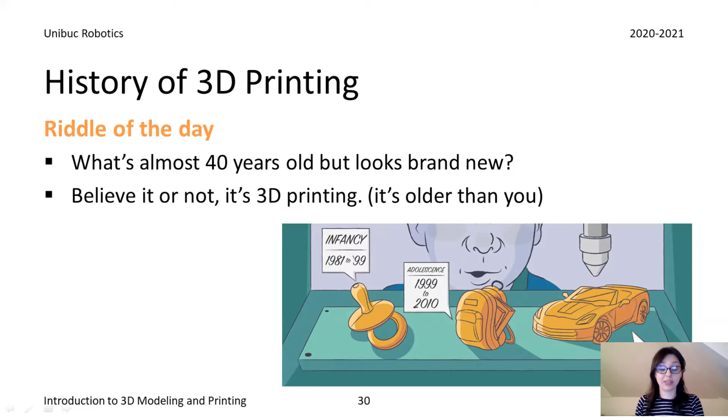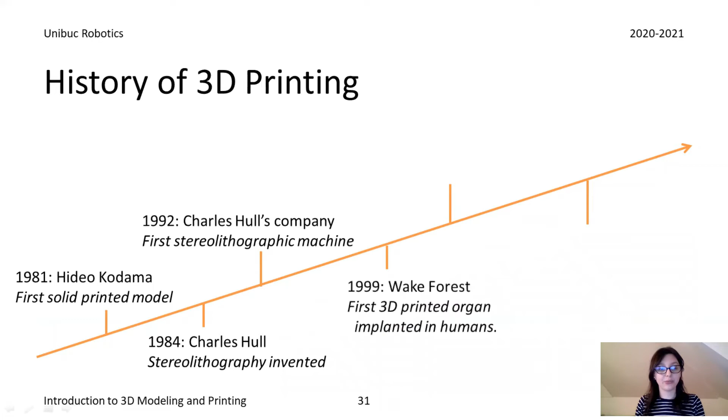Everything started in 1981 with Hideo Kodama, who made the first solid printed model. Here are other chronological events that help you understand how old this technology is. In 1984, stereolithography was invented, the technology of printing layer by layer. Also, in 1999, the first organ was printed and implanted in humans. Again, this is not happening right now, this happened like 20 years ago.

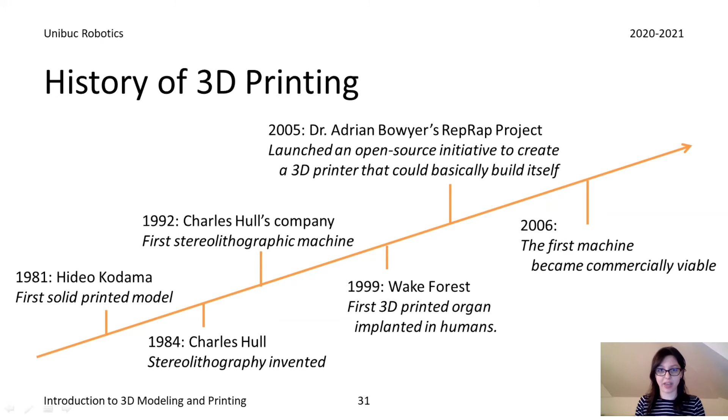But in 2006, the first machine became commercially viable. So right now this is starting to become a normal thing, and I think a lot of people have a 3D printer. Regarding Hideo Kodama, I really want to mention him because he's the one who created the first 3D printer and the first 3D printed object.

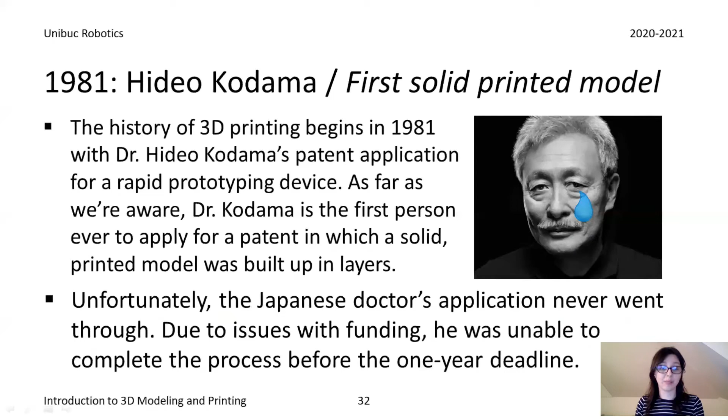He tried to patent the invention, but because of funding issues and so on, he was unable to complete the process before the one year deadline.

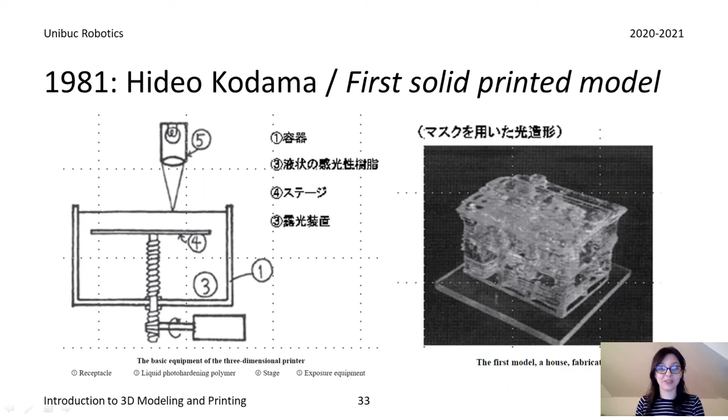Here we can see how the machine was working. It's almost the same as the printers that we have today. And we have a photo of the first ever 3D printed object, which was a house.

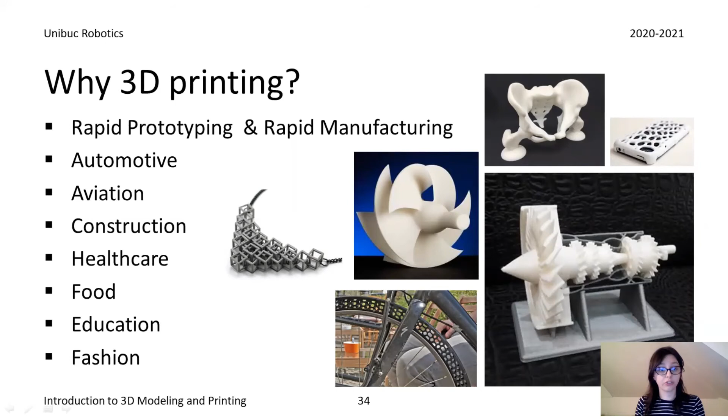But again, why 3D printing? 3D printing can be used anywhere. First, as I said, it's used for rapid prototyping and rapid manufacturing to understand and test if our concepts really work before making them real. It's also used in the automotive industry, aviation, construction, healthcare, food, education, and fashion.

But keep in mind the word sustainability when it comes to 3D printing. Sustainability focuses on meeting the needs of the present without compromising the ability of future generations to meet their needs. We are using a lot of plastic when it comes to 3D printing, so we want to be aware and use it in a responsible manner.

So this course doesn't have the purpose of printing random, awesome, and interesting things. Even though it's very tempting to print them, we need to understand that we shouldn't do this. We'll focus more on objects that solve real problems, or objects that can help us in an educational way to learn how mechanisms work. We'll also try as much as we can not to print with a lot of material.